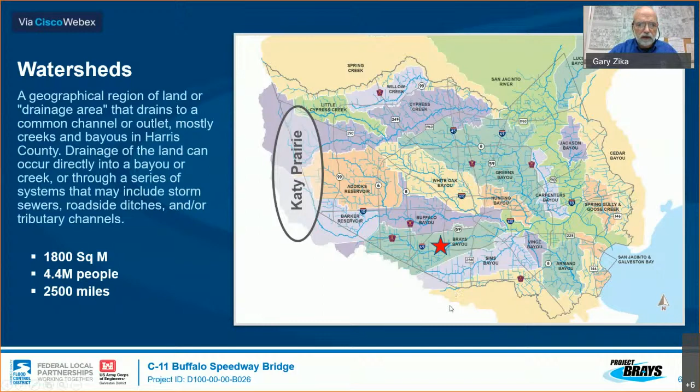Brays watershed, which is what the slide is showing, is approximately 128 square miles. It has a population of over 700,000 people. That 700,000 people hasn't really varied over the last 20 years. The latest census information isn't out yet, but once that gets out, we'll be updating that if it's changed very much. The bayou is 31 miles long. It's the longest bayou in Harris County.

The bayou begins at the mouth at the Houston Ship Channel, which is on the very far right-hand side of this slide, and moves all the way out to Highway 6 on the west end, and the water travels from the west end down to the Houston Ship Channel to the east. It touches many different communities along the way, including the Texas Medical Center, the Meyerland communities, and Westbury area.

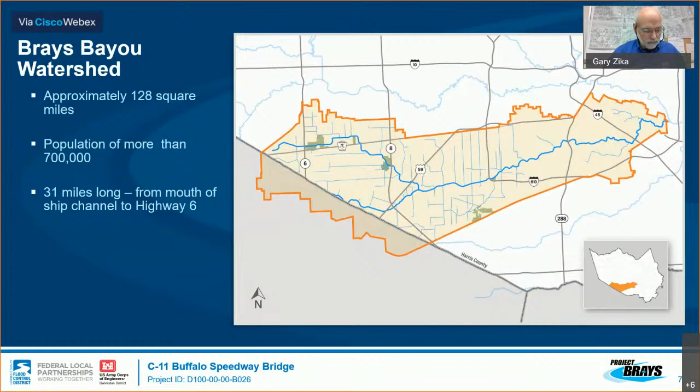In 1980, after the completion of the earlier federal project, which added the concrete lining to portions of Brays Bayou, the watershed continued to experience flooding. As a result, Project Brays, which is a federal partnership effort with the United States Army Corps of Engineers, was initiated. Project Brays is the Flood Control District's largest flood damage reduction initiative to date. When completed, it is estimated that Project Brays will cost more than $480 million and reduce the risk of flooding for thousands of residents and businesses along Brays Bayou.

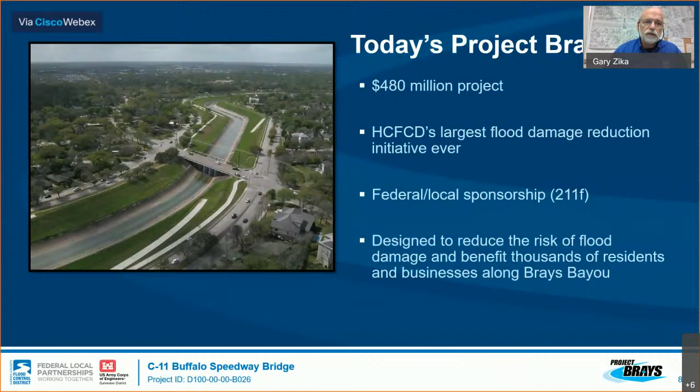In Project Brays, we've got three main tools that we use. One is storing water in detention basins. We slow the water down in the upper portions of the watershed. The flood control district's detention basins of Eldridge, Old Westheimer, Arthur Storey Park, and Willow Waterhole cover more than 800 acres of land and hold more than 10,000 acre-feet of storage in the four basins.

That's our first part. The second part is channel modifications. And so we're trying to move more water out of the watershed from the lower end. So there's 21 miles of channel widening and deepening. That basically goes from Fondren all the way down to the Houston Ship Channel.

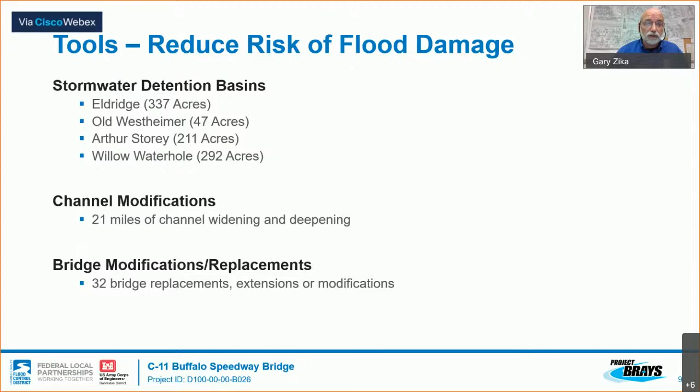The channel modifications then lead to the 32 bridge replacements that we either have to do replacements, extensions, or modifications. You can't widen the channel without doing something with the bridges, and so that's where it leads to the 32 bridges. There's more than 32 bridges along the stretch of the channel, but that's the 32 that we've had to do modifications to.

The majority of the channel modifications are complete to date, and there are 10 bridge replacements or modifications that remain along the bayou to reach the full benefits of Project Brays. There are 4 currently under construction, which include the Ardmore Bridge, Telephone, Lawndale, and the Galveston Sub. There are 6 left to start that include South 75th, Calhoun, Almeda, South Rice, and Chimney Rock. And the 6th one is Buffalo Speedway, which is the one we want to talk about tonight.

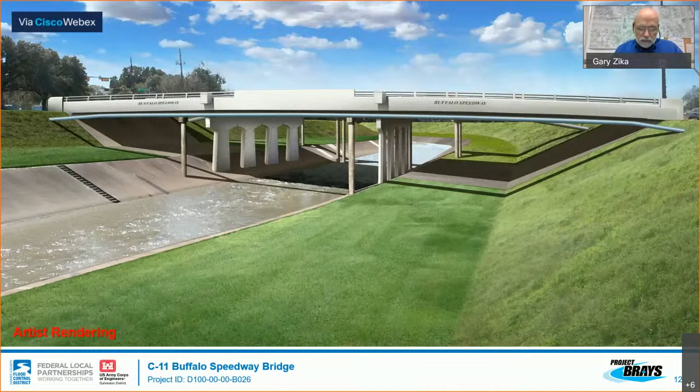The Buffalo Speedway Bridge is located where Brays Bayou intersects Buffalo Speedway. It's shown on the slide, kind of right in the center. This artist rendering of the Buffalo Speedway Bridge project will demolish and replace the current bridge with a higher, longer, and wider bridge. This will increase the capacity of the channel and allow for more floodwaters to flow through Brays Bayou.

The new bridge will be 4 lanes wide, including a left turn lane at each intersection, and have expanded 10-foot wide sidewalks on both sides of the bridge. The construction cost is estimated to be approximately $9.5 million, with the city of Houston contributing towards the cost of the sidewalk enhancements and the left turn lane on the bridge.

As part of Project Brays, the Harris County Flood Control located, surveyed, and inventoried every tree along the bayou to determine the health and the type. We've been using these surveys in our planning and design process to ensure the preservation and moving or replacement of existing trees. As a result of our efforts, more than 800 more acres of green space will be created for residents and businesses in the Brays Bayou watershed.

Another important program implemented by the Harris County Flood Control District's Maintenance and Infrastructure Department is the Wildflower Program, which allows Harris County Flood Control District to plant native wildflowers along the bayou, increasing its beauty. Keep in mind that the additional trees and shrubs and flowers will occur once the flood damage reduction projects of Project Brays are complete. And in your area, that means that we've got to get the bridges complete. We're trying to give the contractor enough working area around the bridges.

We will be impacting trees in the immediate area of the Buffalo Speedway Bridge. Some of those are on city right-of-way, which we've got tree permits to remove. And then we'll be mitigating those trees along with planting more additional trees in the immediate area of the intersection and along the bayou. So to date, we've already planted 52,000 trees and shrubs along the bayous. A fair bit of that's in the detention basins, but we've also done along the channel, the freshwater marsh.

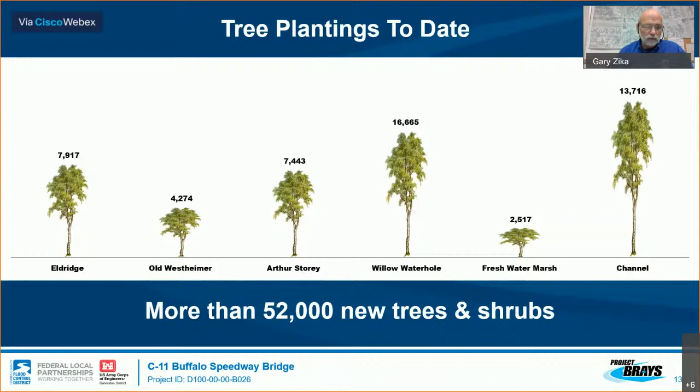Traffic detour during construction. The Buffalo Speedway Bridge will be completely closed to commuter and pedestrian traffic. When traveling northbound on Buffalo Speedway, the detours will direct the traffic to the Kirby Bridge crossing. That will go over Brays, and then you could use North Braeswood to get back to Buffalo Speedway. If you're heading south, the detours will direct you to the Stella Link Bridge, which we've recently completed, and then from Stella Link, you'll be directed back to Buffalo Speedway heading south.

And we urge everyone to follow the detours. There's going to be road closures. When I say road closures, the bridge will be closed, so there'll be no through traffic across the bayou at Buffalo Speedway during construction. We'll also be having lane closures on North Braeswood and South Braeswood. So the east-west direction on both those roads will be down to one lane in each direction.

And so the intersections have to be completely rebuilt. So there'll be a lot of changes of those detours. So one day you may be going and you're sticking to the left side. You know, a week later, it may be to the right side. So please follow all the detour signs and warning signs.

Pedestrian detour: during the construction, the Buffalo Speedway Bridge will be completely closed to commuter and pedestrian traffic. The detour for the pedestrian traffic will direct people on the trail that goes east and west along Brays Bayou to the sidewalk along North Braeswood, all the way down past Buffalo Speedway, all the way down to Stella Link, which will get you back on the main trail going east and west.

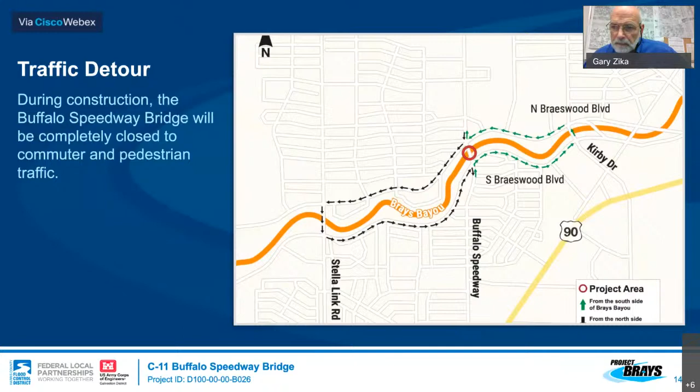All right, Rusty, Tom is asking what City of Houston department approved the trail detour? Houston Public Works.

All right, this one's for Gary. Elena asks, the trail crossings for pedestrians are located at some distance from the traffic light, which does not allow some cars to see if a cyclist is crossing the road. This seems like a safety issue. Would it be possible to place pedestrian crossing buttons to stop traffic when people need to cross?

The detour that we're placing for the east-west trail takes it to the Kirby Bridge. There's a ramp that goes from the lower trail up to Kirby. There are traffic signals at Kirby. People have to follow the crosswalks to the north side, and then follow the sidewalk west all the way to Stella Link, then cross Stella Link, and they could get to the trail going east or coming back west, depending on how they want to go.

So as part of the detour plan, we're not doing any mid-street crossings. There are presently people using mid-street crossings as they access the trails. And again, that's what Rusty had mentioned earlier. If there are some additional places that you want, that's something the city could do in the future. But as part of the detour plan, we're not proposing any crossings at locations where there's not a traffic signal.

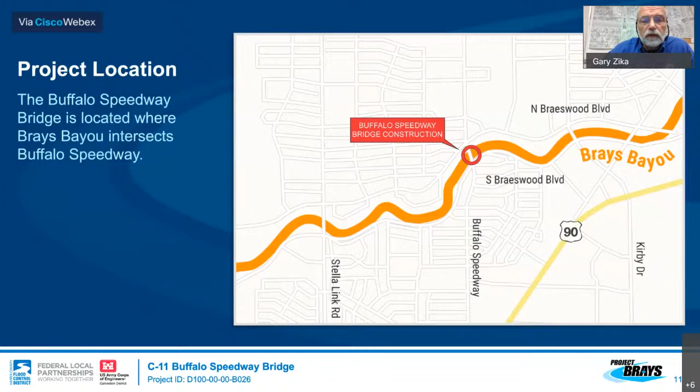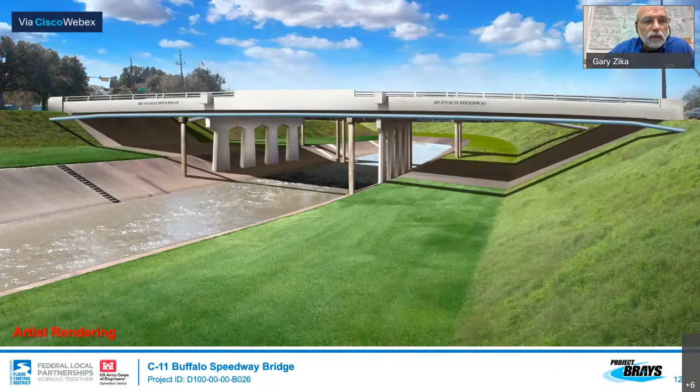But Buffalo Speedway Bridge was an older bridge, had a lot of short spans, so we're replacing the bridge with 3 large spans that will span across the bayou. The bridge is going to be wider. It's going to have 5 lanes, 2 lanes in each direction, and a left turn lane down the center. And it's also going to have 10-foot sidewalks on each side of the bridge. Part of the work also includes a force main bridge. There's presently a sanitary force main on the bridge, which we've got to relocate to a new bridge just to the downstream side of the bridge.

The Greenbriar Bridge was completed in the summer of 2020. Stella Link was completed in the fall of 2020. And then the Buffalo Speedway Bridge construction should start by the end of the year, and it should last about a year, so it'll be finished by the fall of 2021.

All right, thank you, Gary. Scott is wanting to clarify something that you said earlier. He says it sounds like the contractor wants to close the bridge when they start the replacement of the existing sanitary sewer and water lines downstream. If that's accurate, can we challenge them on this? To have the bridge closed prematurely again would be disappointing unless there is justification other than it's convenient for the contractor. Maybe we can clarify that.

Yeah, there's a lot of work on that force main that has to be done. When he closes the road, the force main just doesn't end at the edges of the bayou. It goes into the street, into the intersections. So he's got to close the roads east and west where it's going to go down to 1 lane. And so he's got to close the bridge at that same time.

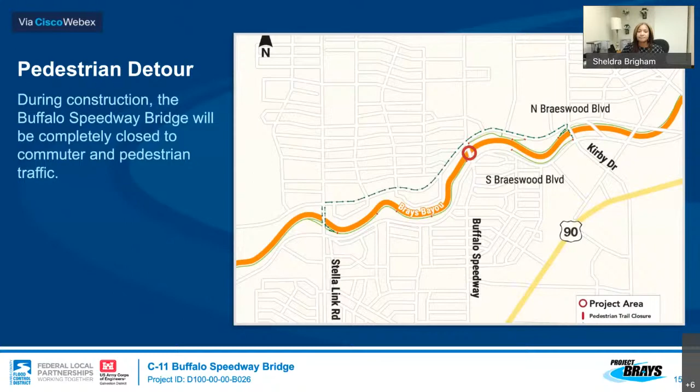Yeah, on the artist rendering, it's showing the water basically across the shelves. It's not very deep in most places. Further you get downstream, like towards the medical center, it gets deep enough that you really can't drive it. But most of it's just a few inches deep, and that's just what we call the base flow going down.

That's basically a lot of effluent coming out of sewage treatment plants that are upstream, and groundwater that's seeping into the channel. And so once we get all the bridges replaced, we don't expect it to change much. It's only an inch or two deep in certain areas, so we don't expect it to change. So it'll probably still be on the shelf in some places and some places not.

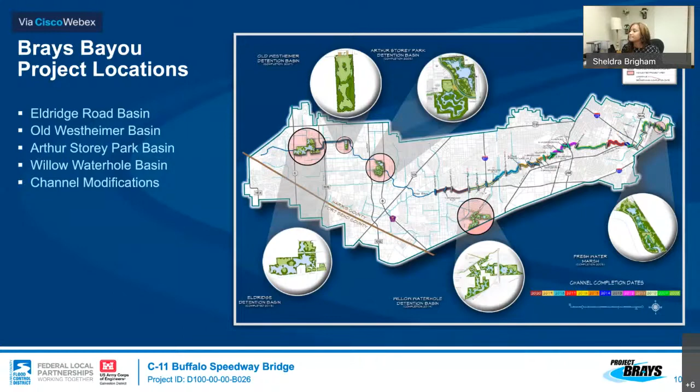Rusty, this next question is for you. Will the Project Brays website be updated to show construction progress and provide construction updates? Yes, the Project Brays website will be updated and will show pictures and give construction updates.

If you live in the area and you're watching the construction going, if you notice when the piers become finished at the top and the abutments are finished on the side, very soon thereafter the beams will be coming in, and that'll be a sight to see because those are going to be 105-foot long beams, and they'll pick them up with these massive cranes and take them through the air and then place them in where they're supposed to be.

And it'll be a pretty big sight to happen in that area because they do it all one after the other, so they'll do 15 in one go. So that'll be pretty interesting to see. So we'll be able to say when that's going to happen, but if you live in that area, you're going to have a much better timeline of when it actually is happening.

And another thing that will be on the website soon is the progress of Project Brays since Harvey to Beta. Just what we've done there, which was a couple bridges taken down, a couple of them completed. We ran the model for the flows that were a result of Beta, and we had over 600 homes that flooded in Harvey that didn't flood during Beta because of the work we've done. So every little bit helps, and every little bridge being done is very difficult at the time, but when we get high rain events, it saves homes.

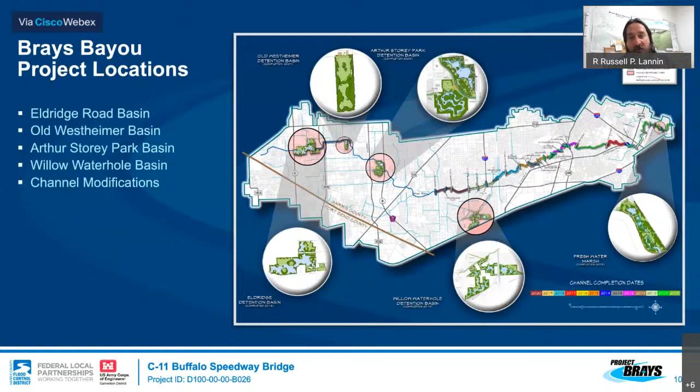the westbound traffic on South Braeswood that's going to the west will shift over to the eastbound traffic right about where the medians are. It'll shift over to where there'll be one lane going each way on the southbound lane. Instead of having two lanes, there'll just be one lane, and that'll allow the northern part of the lane to be used for staging and construction.

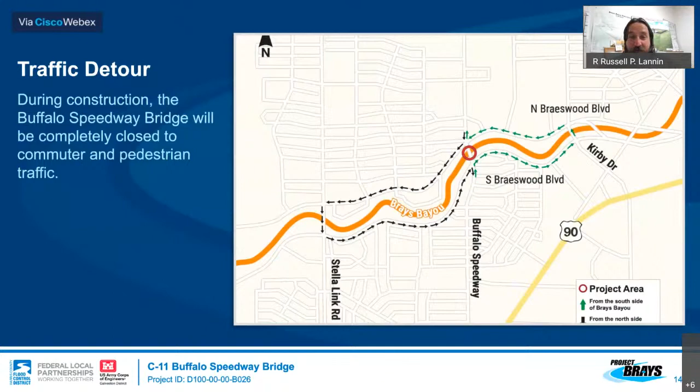All right, and one more question for you, Rusty. It's from Vikram. Is there an approximate start date for the closure of the bridge? Probably about a month from now, give or take a little while, but that's what the contractor's shooting at. I don't want to say a date because it'll move, so before the end of the year. Gotcha. Thank you, Rusty.